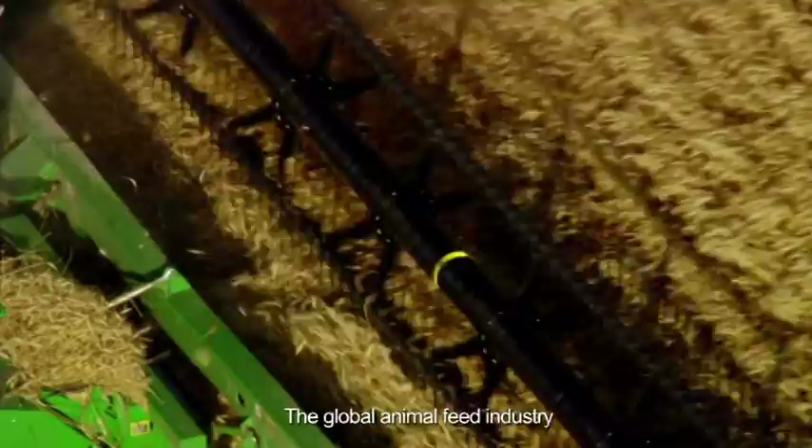The global animal feed industry is developing at an unprecedented rate, and whilst this is welcome news for manufacturers, it also produces a number of problems, such as how to maintain growth, continue to provide innovative products, and control costs in a way that will provide higher value for clients and help them continue to grow and prosper.

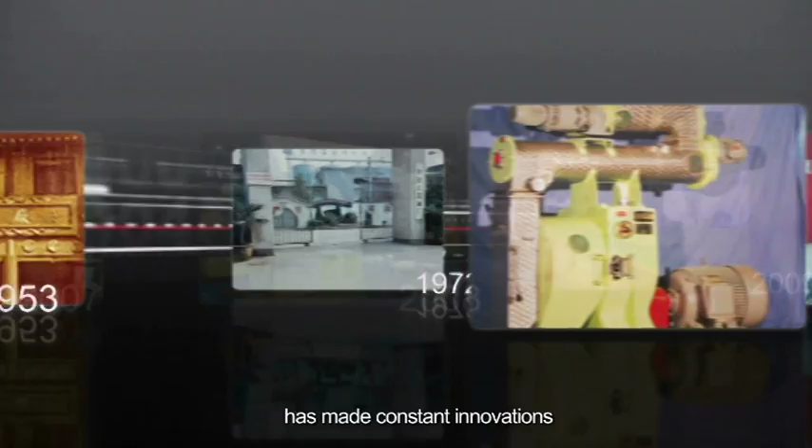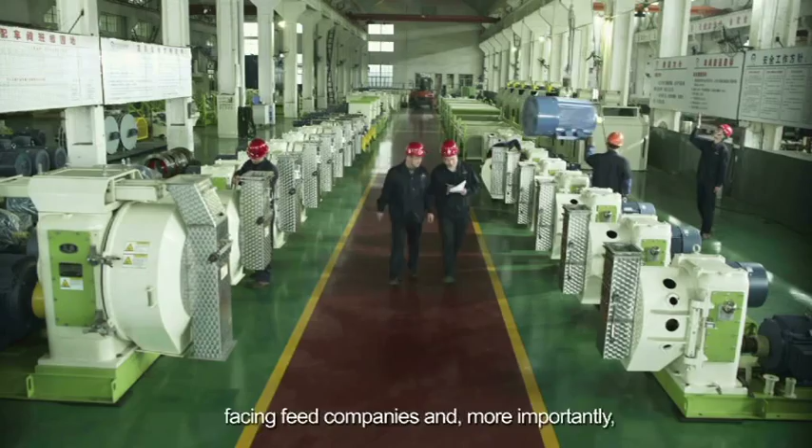ZCME, established in 1918, has made constant innovations in the feed machinery industry and accumulated a wealth of experience in tackling the various challenges facing feed companies and, more importantly, is able to offer a range of comprehensive solutions.

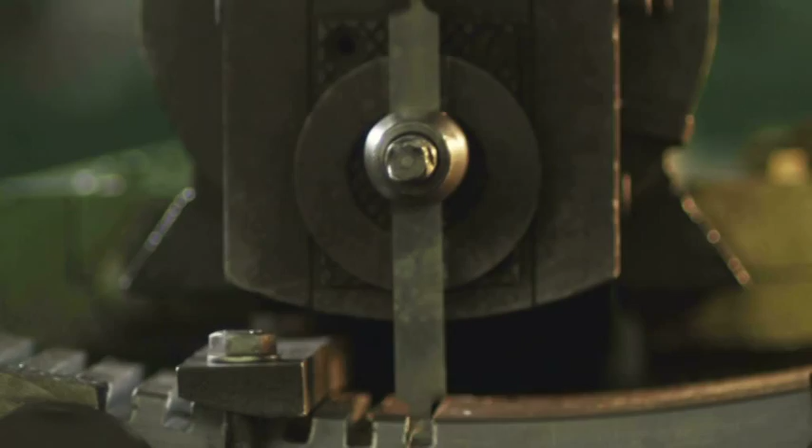ZCME has now evolved into China's largest manufacturer of feed machinery. ZCME today has successfully constructed more than 2,000 turnkey projects around the world, covering fields of poultry and livestock feed, aquatic feed, pet feed, premix feed, sawdust pellet, fertilizer, silo storage, pasture, electrical control, and garbage treatment, etc.

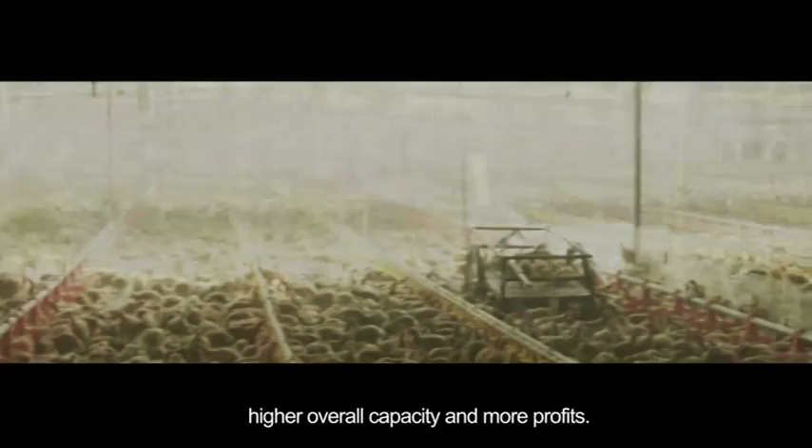ZCME projects are designed to deliver to the client higher feed quality, higher overall capacity, and more profits. Here's an example: a complete poultry plant constantly seeking solutions of higher capacity, lower costs, and higher feed quality due to the rising costs for electricity, water, raw material, etc.

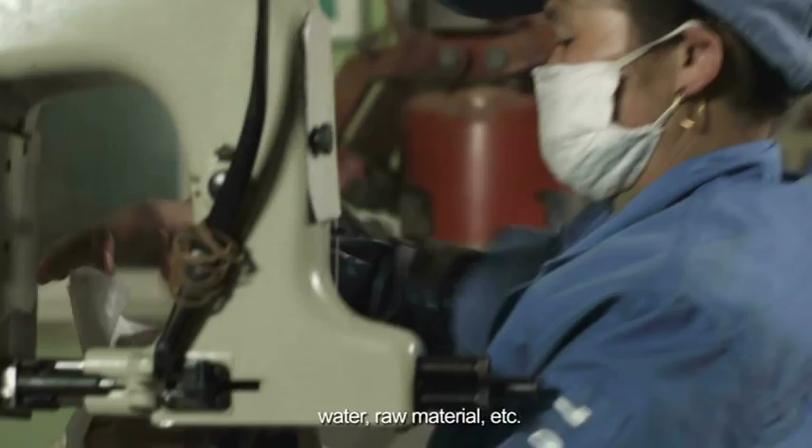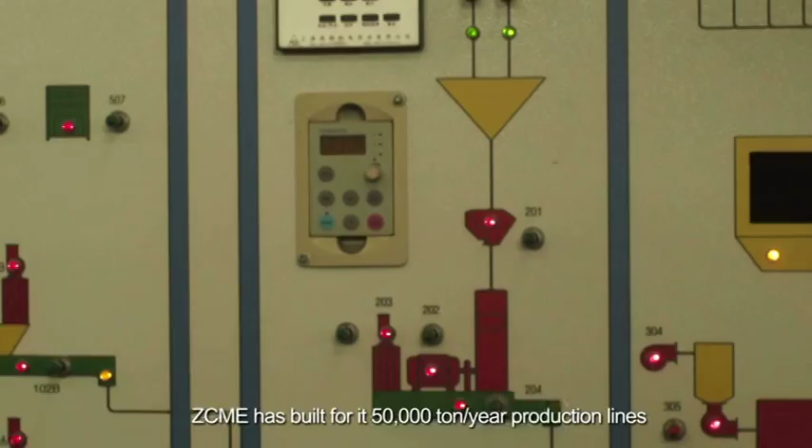ZCME has built for it 50,000-ton-per-year production lines, which consist of 3 high-grade poultry feed lines and 1 high-grade aqua feed line.

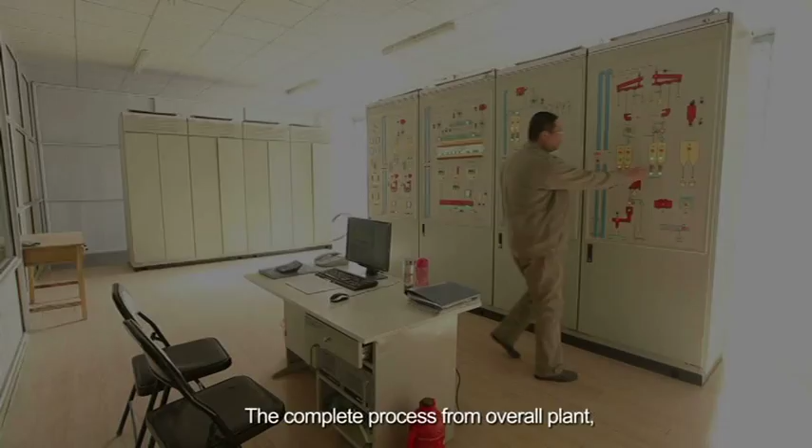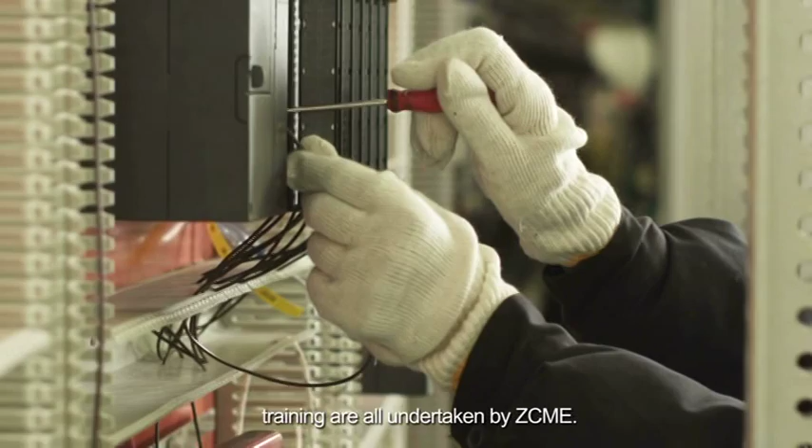The complete process from overall plant, technology design, equipment manufacture, installation, electrical control to service training are all undertaken by ZCME. The new project has obtained 10% higher capacity after putting into production, and nearly $500,000 can be saved per year at the current feed price of $10 per ton.

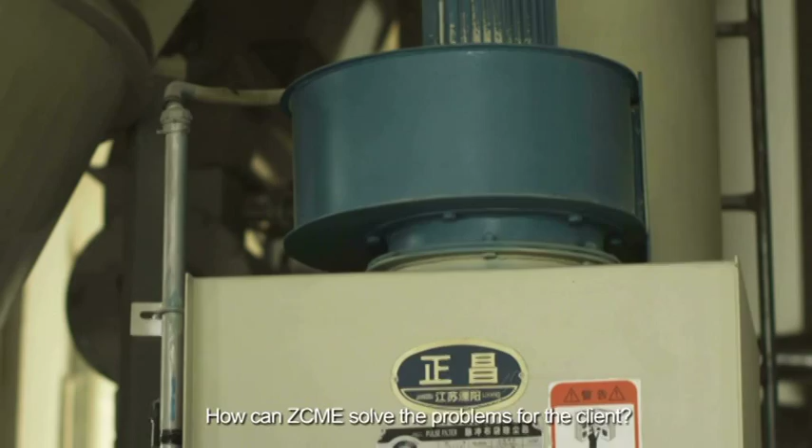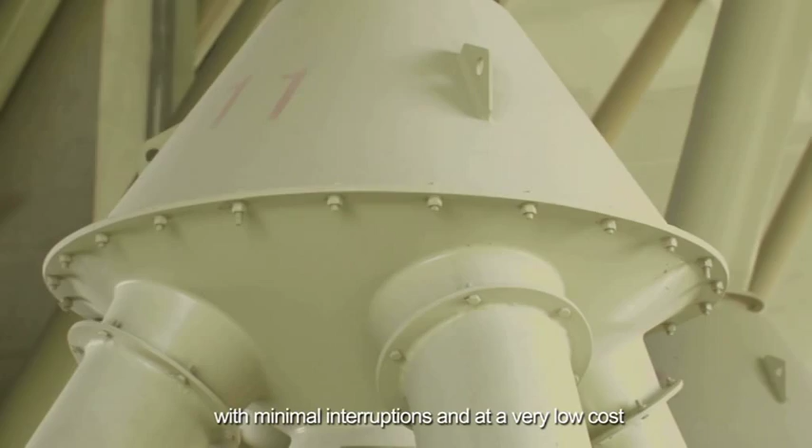How can ZCME solve the problems for the client? During construction, ZCME has scientifically selected and arranged plant and machinery, allowing expansion to take place with minimal interruptions and at a very low cost, saving a lot of space and costs.

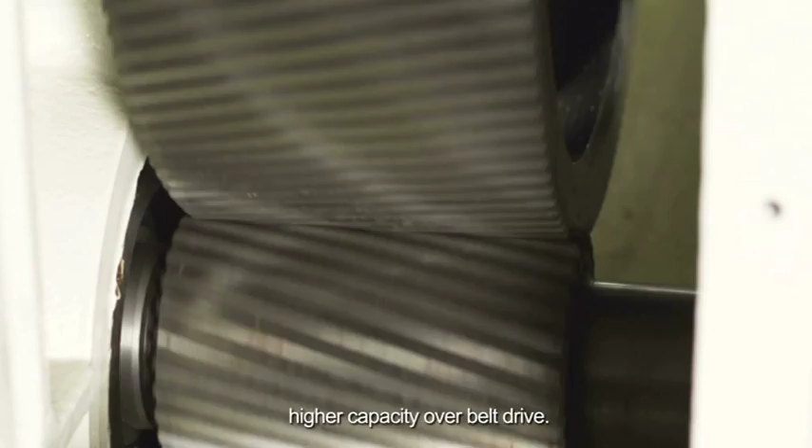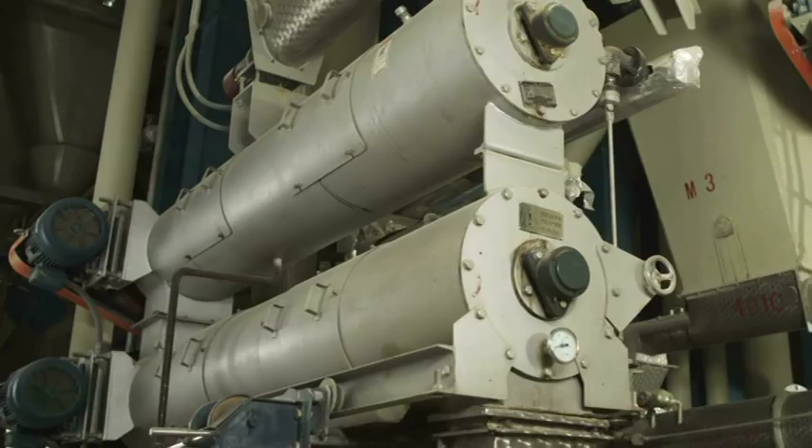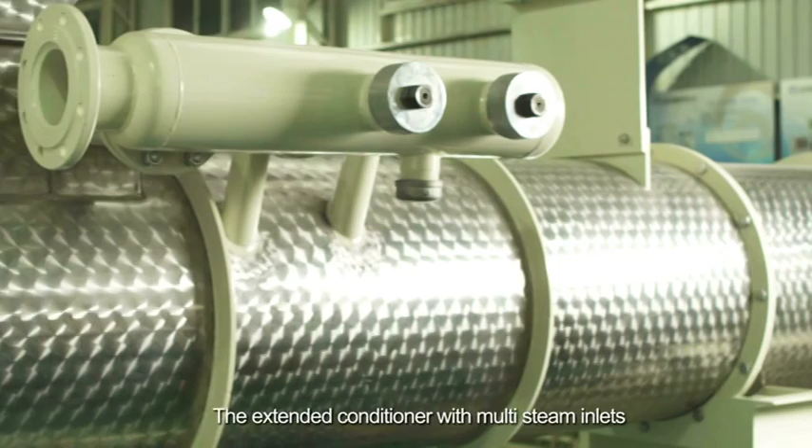The unique conditioner and custom-built steam pipes ensure sufficient cooking of the feed. The extended conditioner with multi-steam inlets has prolonged conditioning time by 10 seconds, greatly improving pelleting capacity.

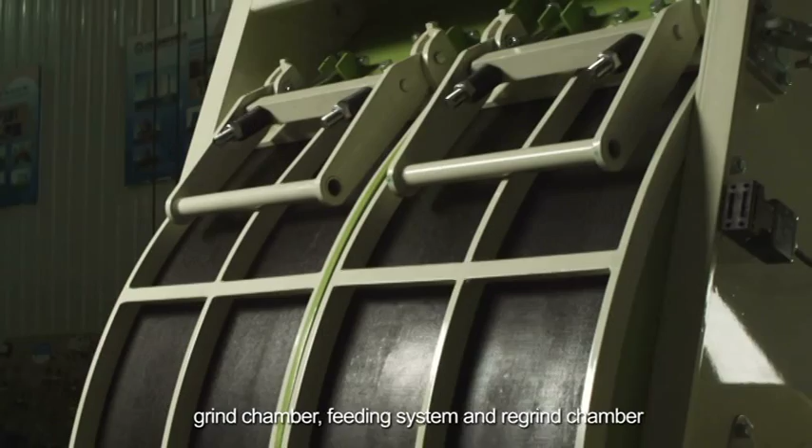The hammer mill with improved rotor assembly, grind chamber, feeding system, and regrind chamber has attained 30% higher capacity, taking an 80-ton-per-hour corn grinding line for example. It will reduce energy consumption by 30% and save electricity costs by $50,000 annually.

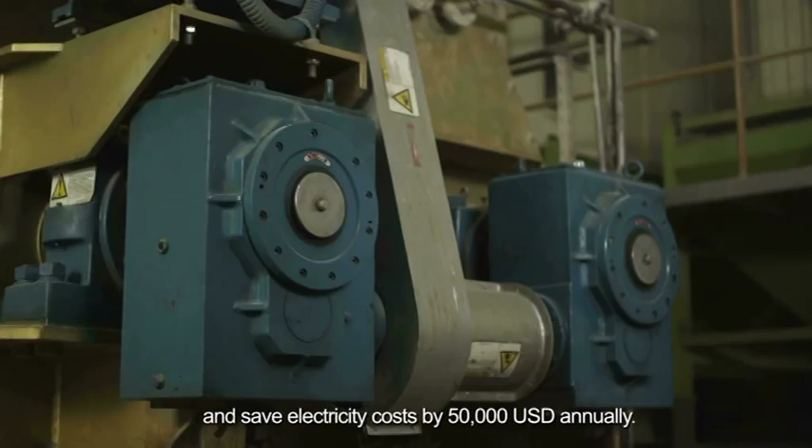The mixer is equipped with a dual reducer of European Forberg technology, and its uniformity is over 95%, greatly saving energy.

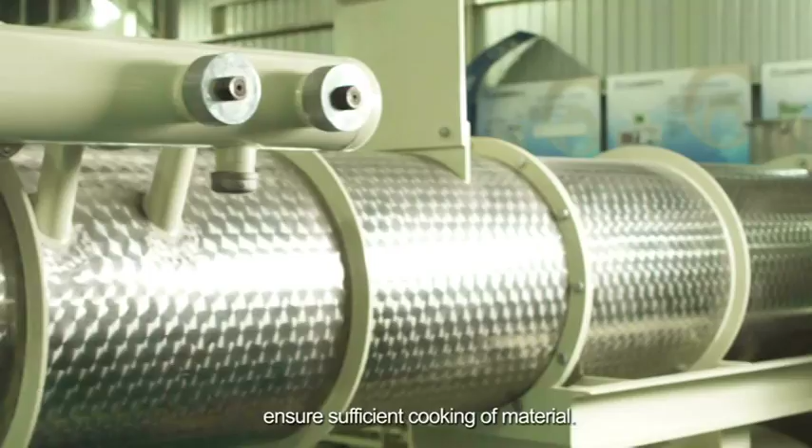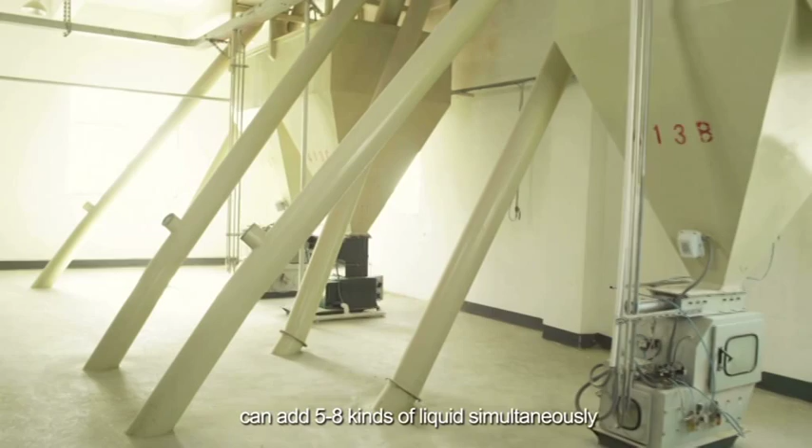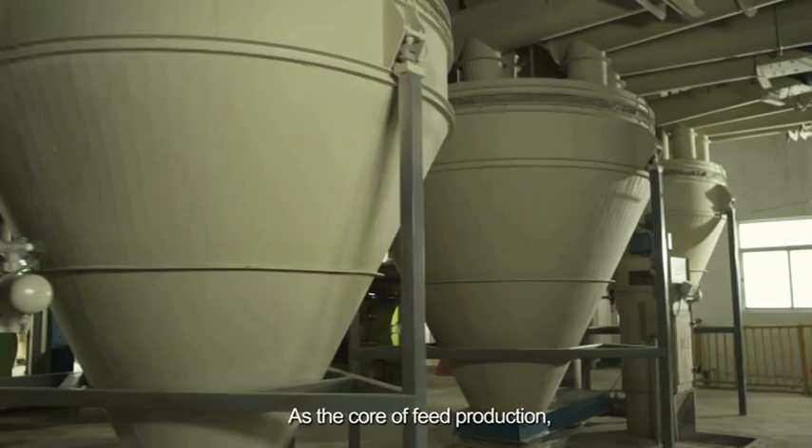Multi-steam inlets and accurate steam adding systems ensure sufficient cooking of material. The powerful liquid pulse addition system can add 5 to 8 kinds of liquid simultaneously so as to improve feed nutrition completely. As the core of feed production, batching accuracy has a direct impact on alimentation quality and feed nutrition.

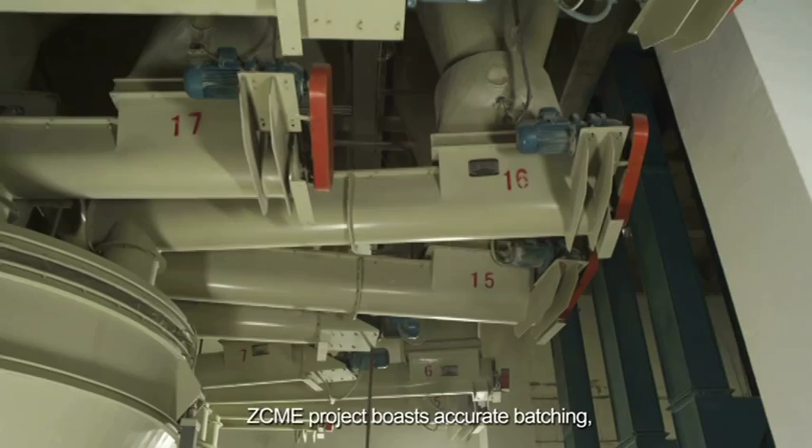ZCME project boasts accurate batching, high-precision sensor rod, and short batching cycle.

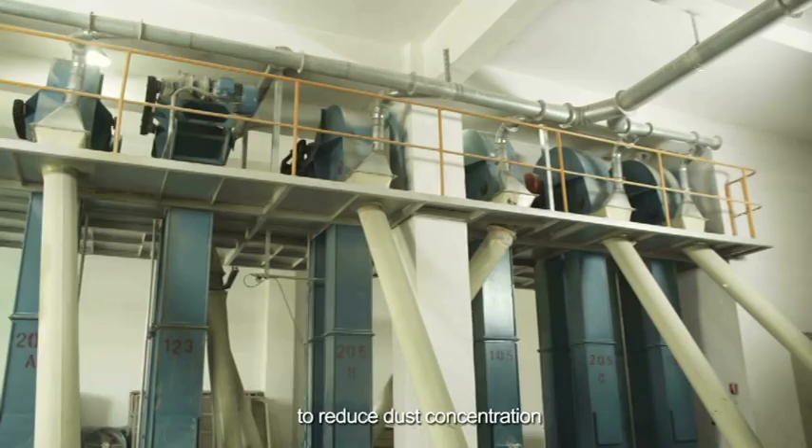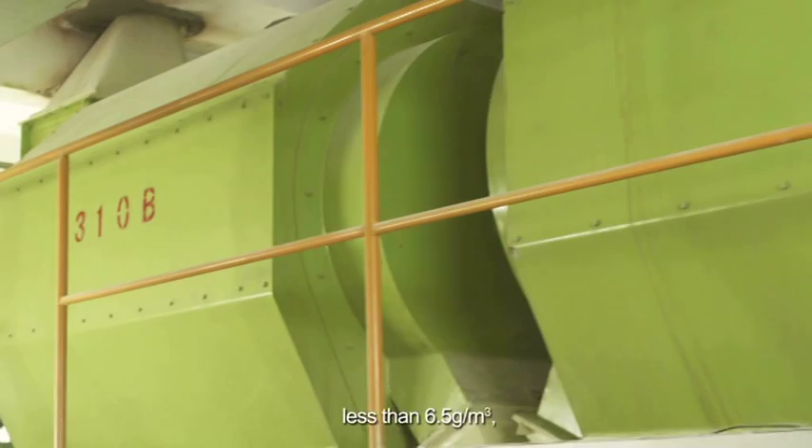The elevator is equipped with separate piles to reduce dust concentration and prevent explosion. All bins and screens are controlled by centralized pulse filters with dust concentration less than 6.5 grams per cubic meter, below the industry standard of 8 grams per cubic meter.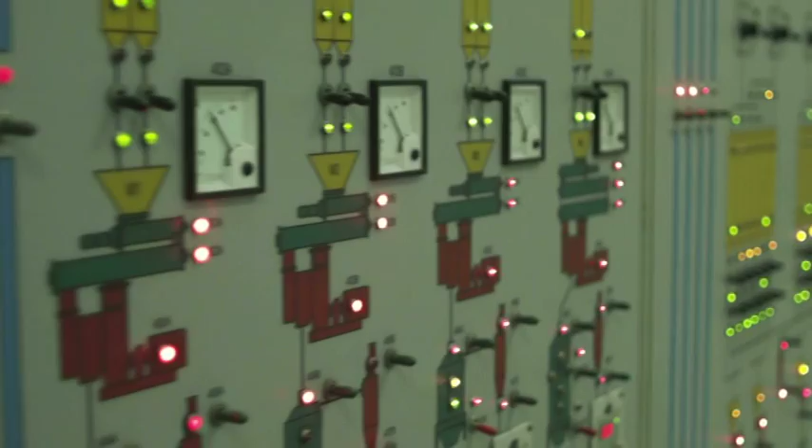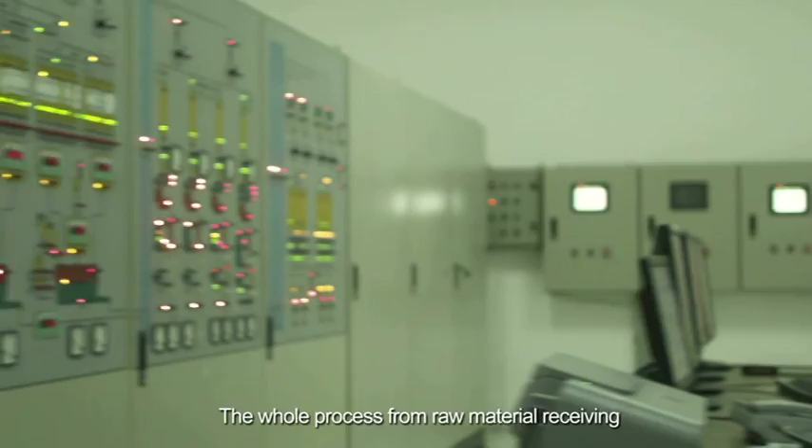Worth mentioning is the state-of-the-art technology and high automation of ZCME projects. The whole process from raw material receiving to finished production transportation is controlled by a full-screen PC, which can dynamically display flow rate, current, temperature, and capacity. The whole production line only requires one-man operation.

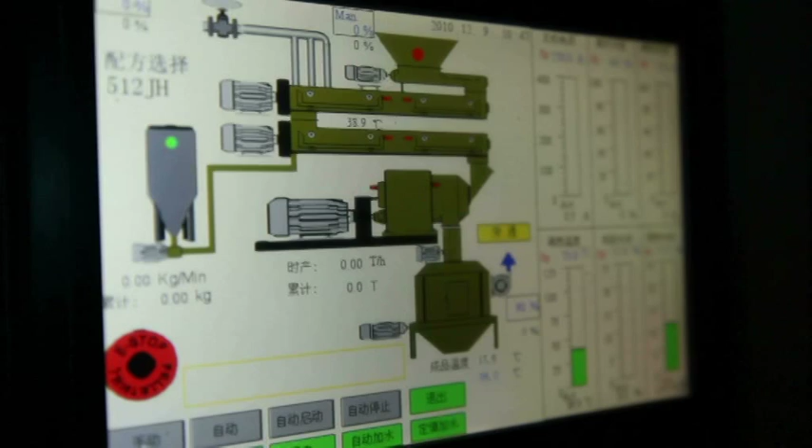We cut down 15% costs with ZCME machineries. The feed quality is better and capacity is higher. ZCME has indeed solved our problems.

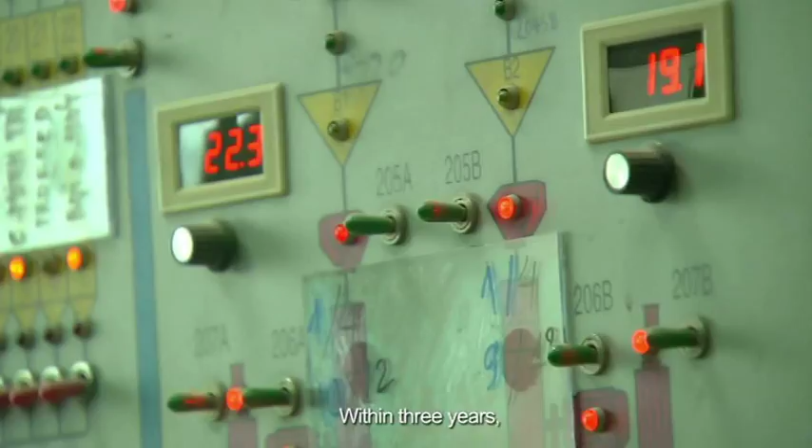ZCME has constructed 6 modern plants and 9 production lines for Vietnam Dabaco ever since the establishment of the partnership. Within 3 years, Vietnam Dabaco developed into a fast-growing comprehensive agricultural company in Vietnam and successfully went public in 2008. This is how a director of Dabaco explained the relationship.

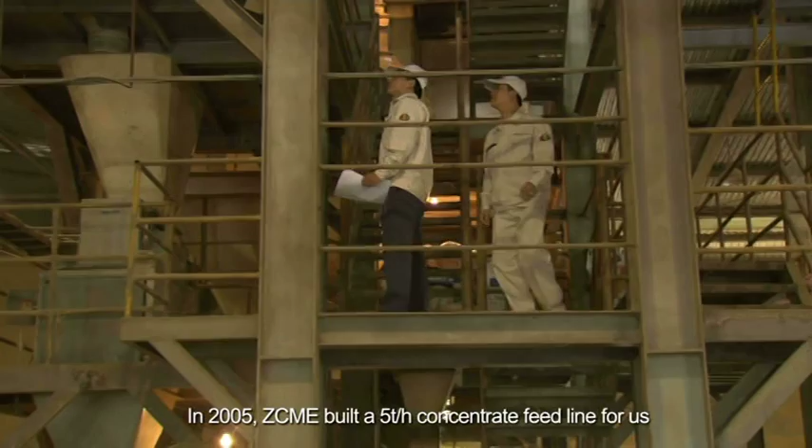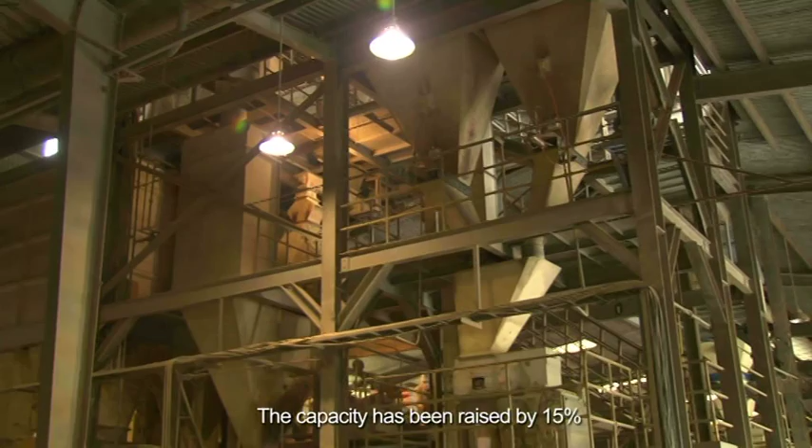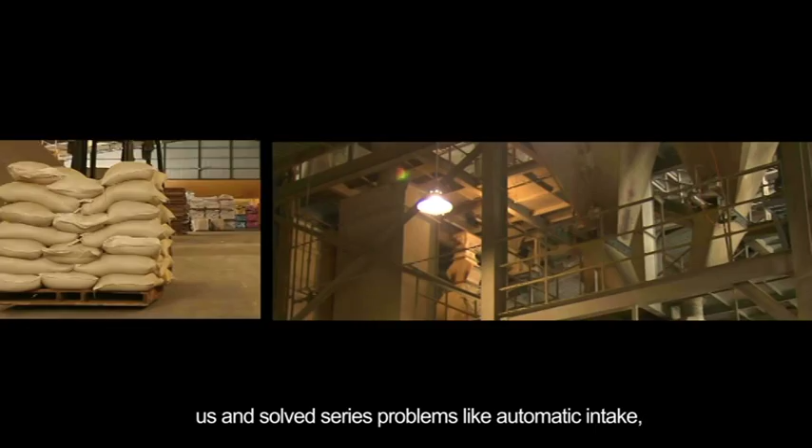In 2005, ZCME built a 5 tons per hour concentrate feed line for us and supplied machinery for the whole process. The capacity has been raised by 15% since it was put into production. In March 2006, ZCME reconstructed the raw material warehouse for us and solved a series of problems like automatic intake, elevation and transportation, greatly improving automation and efficiency.

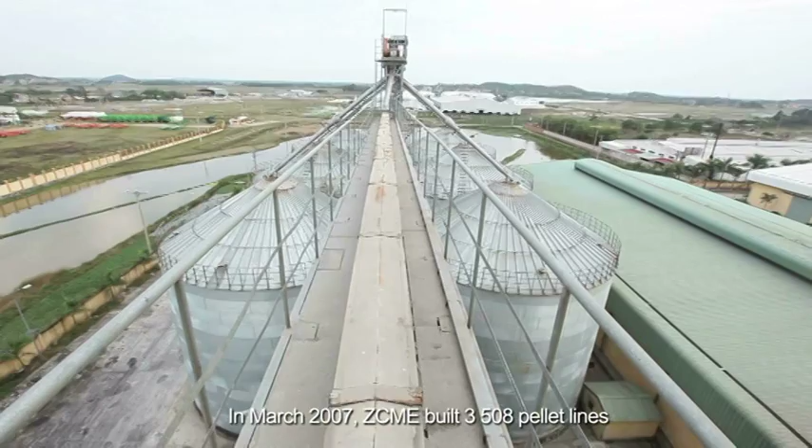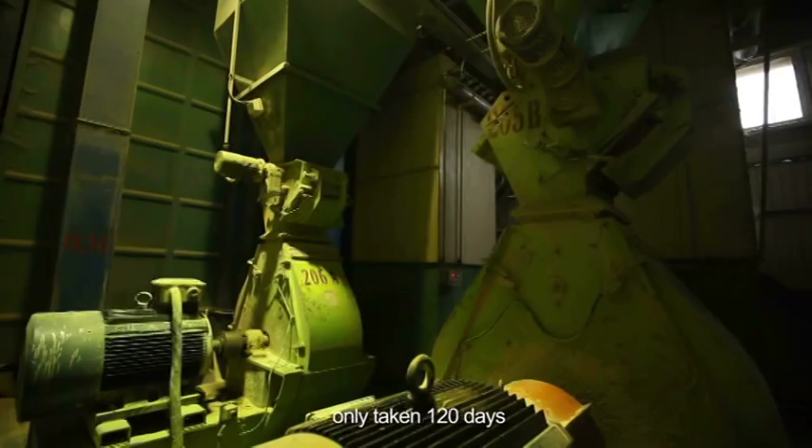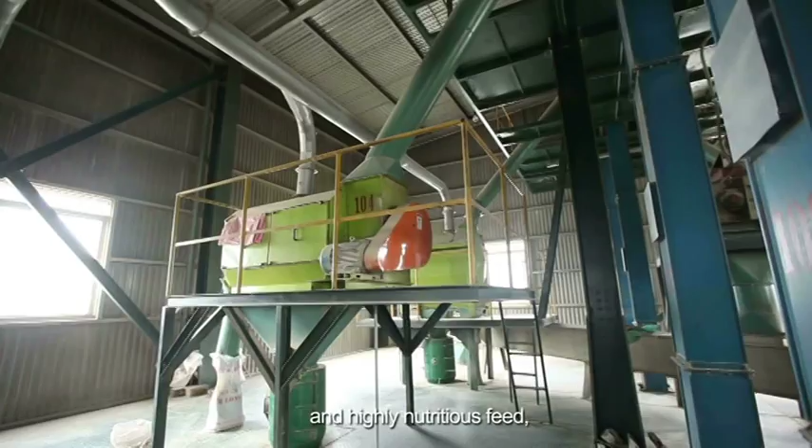In March 2007, ZCME built 3 508 pellet lines and equipped 8 steel silos for us. We were once again surprised by the speed and efficiency of ZCME, as the whole process took only 120 days, and the project passed inspection at one time. The 50 tons per hour feed project produces beautiful and highly nutritious feed, helping us expand the market.

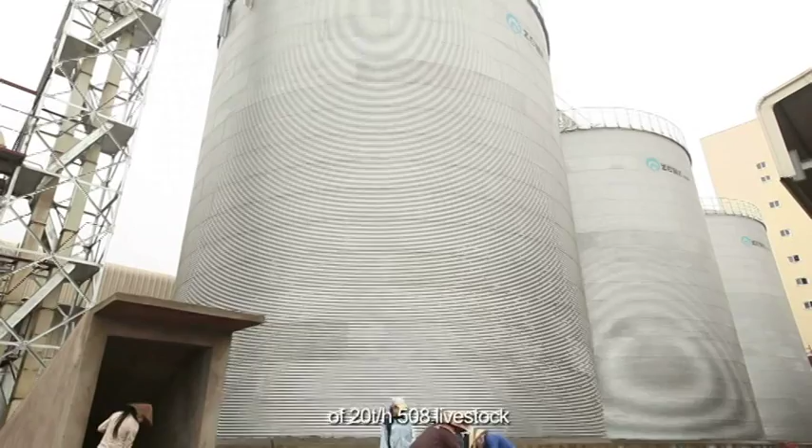In January 2008, ZCME built one 20 tons per hour high-grade fish feed extrusion line for us. In May 2009, Dabaco signed a contract for 2 lines of 20 tons per hour 508 livestock and poultry feed with ZCME.

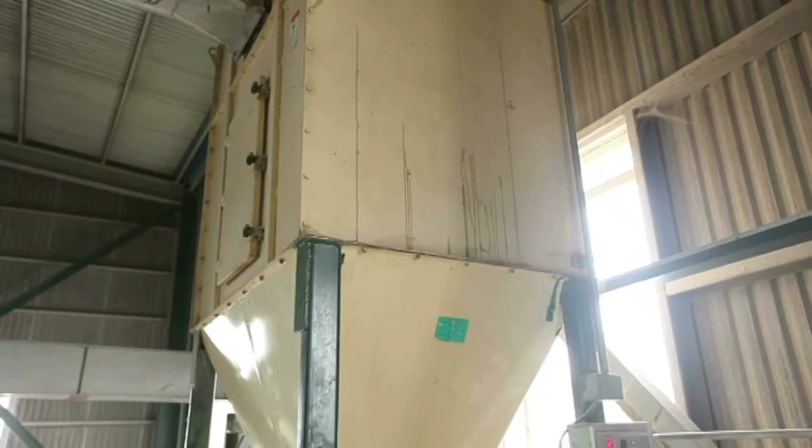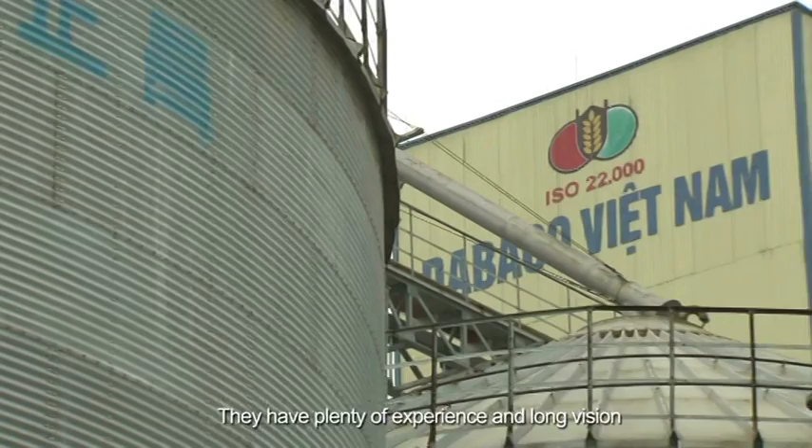They have plenty of experience and long vision, and they know us quite well. We trust them.

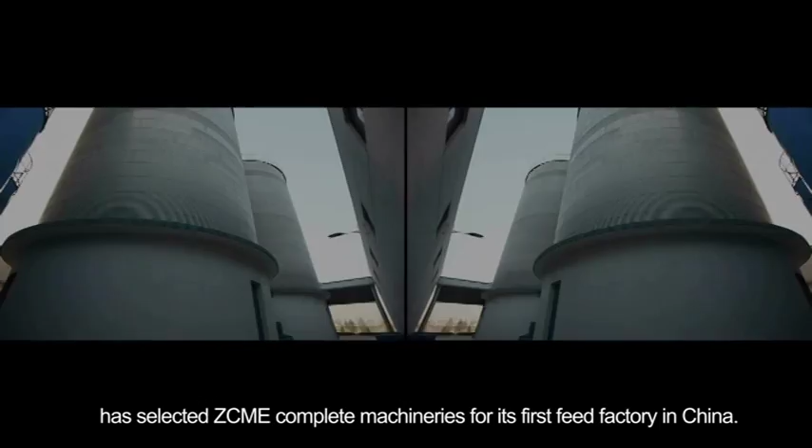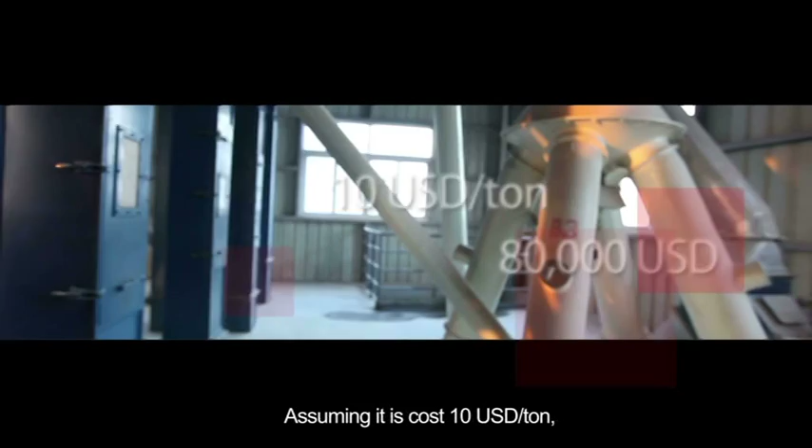Tyson Group, the world's largest poultry manufacturer, has selected ZCME Complete Machineries for its first feed factory in China. The new factory has 15% higher capacity. Assuming it costs $10 per ton, about $80,000 have been saved per year, which is highly appraised by Tyson Group.

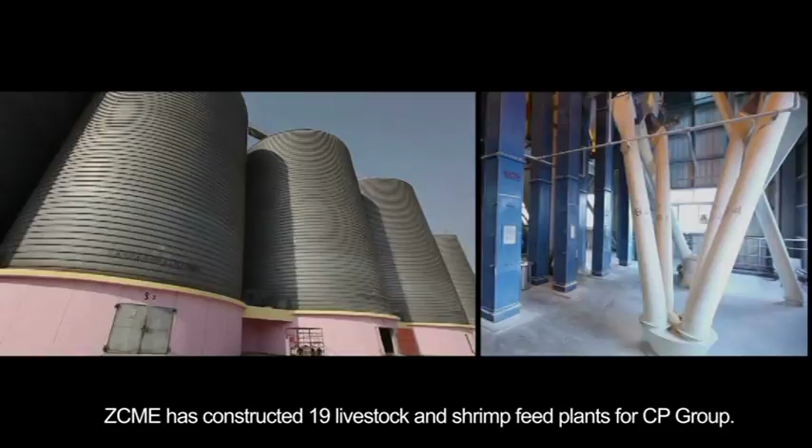Thailand CP Group: ZCME has constructed 19 livestock and shrimp feed plants for CP Group. The 4 shrimp feed lines for Thailand CP can produce 1.7mm shrimp feed at 4.7 tons per hour, while the average industrial standard is only 3 to 3.5 tons per hour.

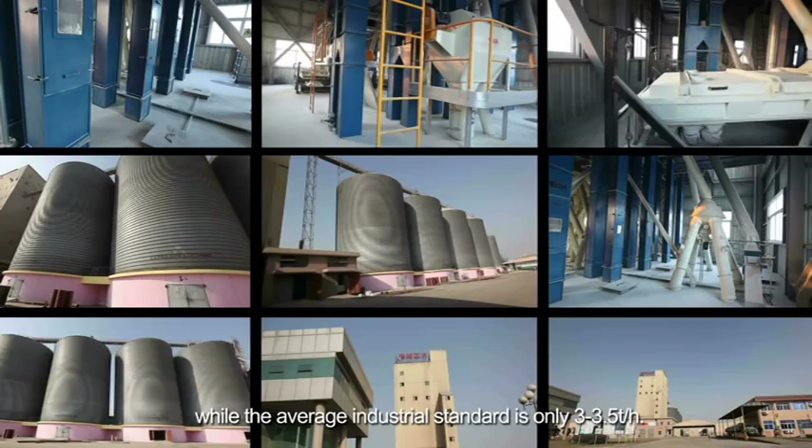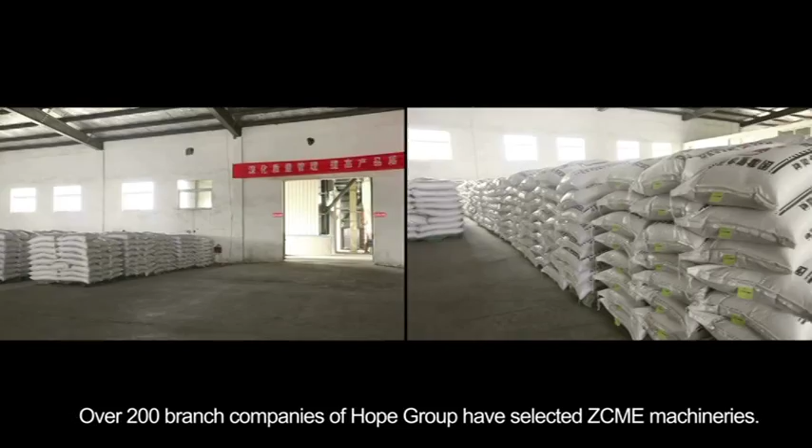Hope Group: Over 200 branch companies of Hope Group have selected ZCME Machineries. Hope Group has signed a long-term strategic partnership with ZCME due to strong faith in the quality, efficiency, and service of ZCME.

We strive for constant innovation of our products. Every piece of drawing contains our sweat and wisdom. We are extremely serious with project designing, as even a minor error could lead to defects.

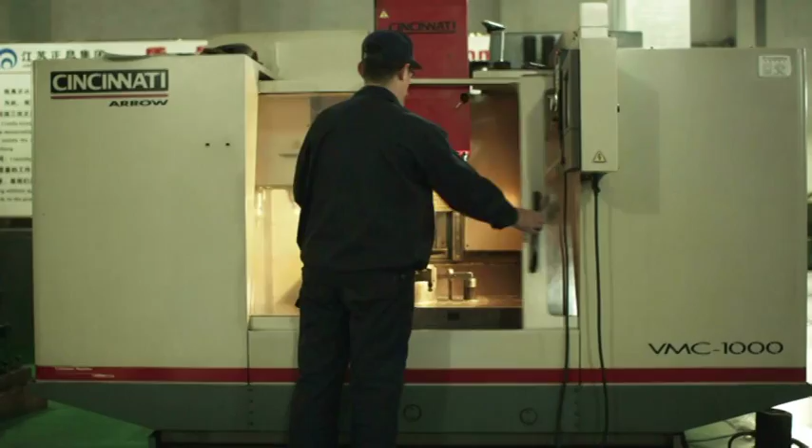We have abundant experience in feed machinery manufacturing. We provide tailor-made products and services. Besides, we have a strict quality supervision system.

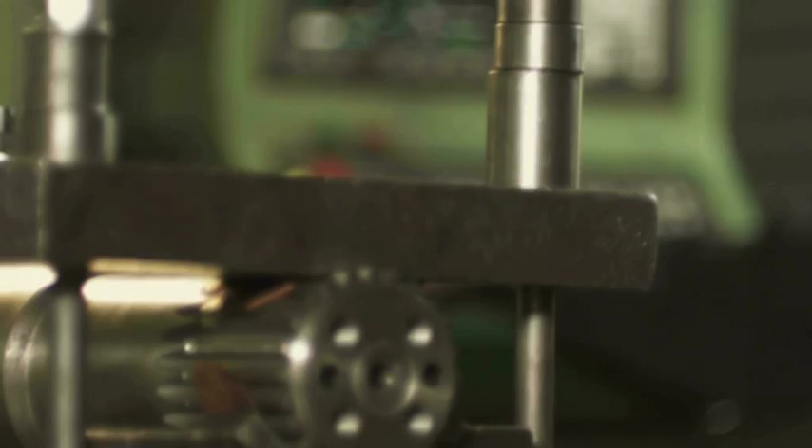We finish installation and commissioning of each project on time and to standard. We try our best to avoid mistakes during installation. It is our basic service code to be responsible for customers.

We deliver quick and considerate after-sales services. Our technicians pay monthly visits to customers and solve technical problems for them. Customers are very satisfied with our services.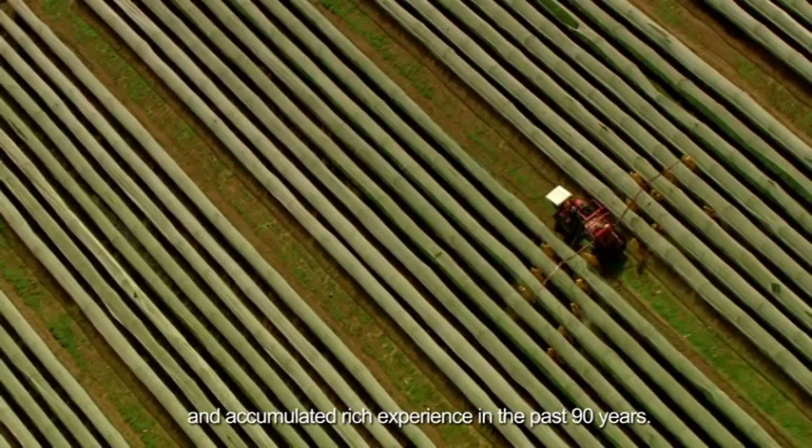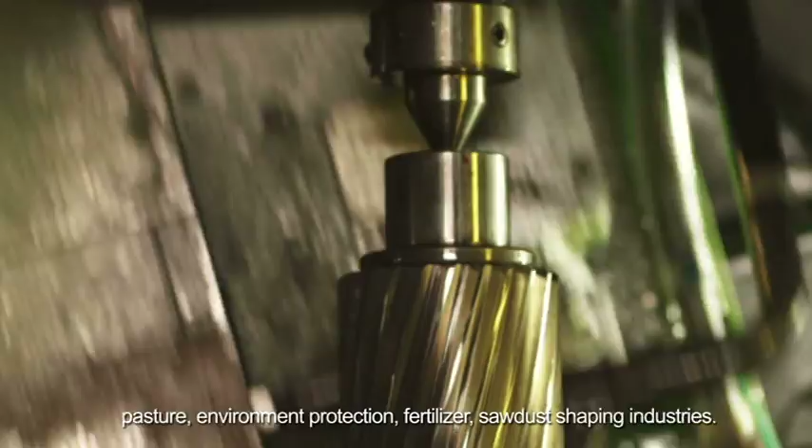ZCME has conquered challenges one after another for customers, accumulating rich experience in the past 90 years. We are now making great endeavors to apply our latest achievements to feed, pasture, environment protection, fertilizer, and sawdust shaping industries.

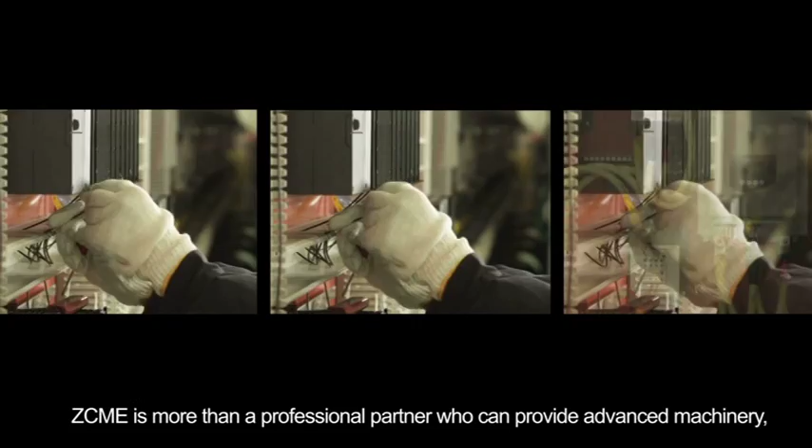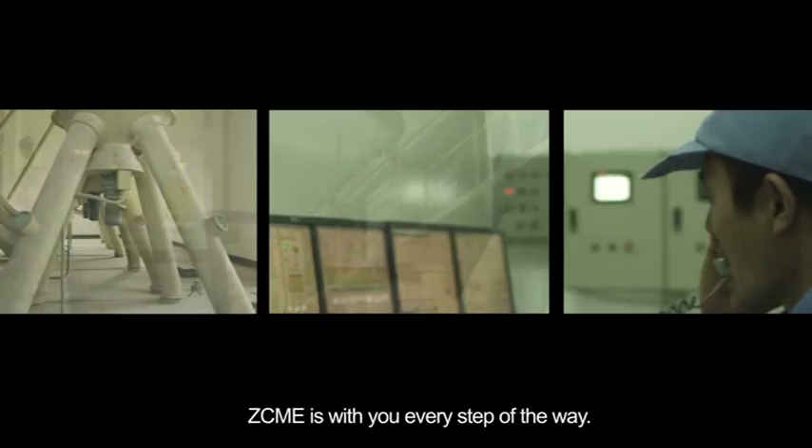ZCME is more than a professional partner who can provide advanced machinery, technology, and management ideas. It is also a true problem solver who knows you well during your development. ZCME is with you every step of the way.